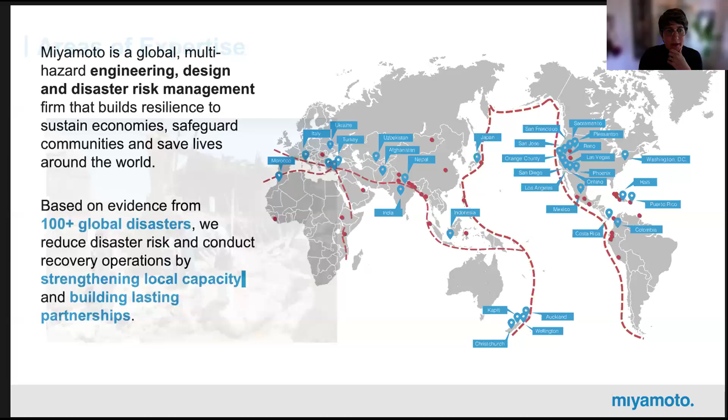So we have quite a bit of areas of expertise. We're able to bridge humanitarian assistance with long-term development and have a more comprehensive series of resilience services that span from engineering to planning to policy. We work with multidisciplinary teams in an interdisciplinary manner. Our areas of expertise range from housing, shelter and settlements that Dave leads, to urban planning and urban rehabilitation, which I lead, to community engagement, behavioral change, policy and planning.

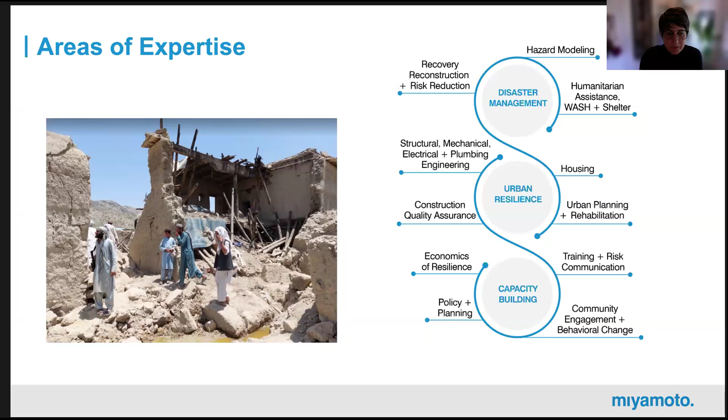One thing particularly important for this presentation is that we're able to provide technical assistance throughout the disaster management cycle, from assessment of damage, to recovery, to mitigation and preparedness. We'll dive into how we leverage local wisdom and vernacular practices within our approach. We'll talk about two areas: self-recovery, more humanitarian assistance and recovery side, and preparedness and long-term development. I'll hand it over to Dave, who will talk about the self-recovery examples, and then I'll take over to touch on preparedness and long-term development examples. So with that, over to you, Dave.

All right, great. Next slide. Hi, I've spent about 25 years working in disasters around the world. Joined Miyamoto about 4 or 5 years ago and lead their shelter and settlements sector. I'm part of Miyamoto's work, as well as working on development projects.

I've just spent the last week or two up in Jakarta working on a risk reduction project, a neighborhood approach to risk reduction in urban settlements in Jakarta. But one of my primary roles is I'm part of the Miyamoto humanitarian assistance team, so I'm involved in our rapid emergency response team.

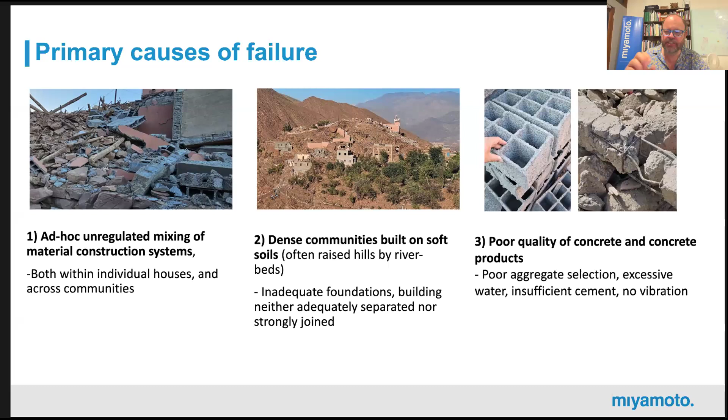We also saw that as those modern elements are being brought back, they're brought back in ways where the traditional knowledge is lost, but the new knowledge about modern building techniques isn't brought in. This is a classic, one of the primary causes of failure that we saw there. You can see on the right hand where these buildings survive, and there's all these little details in there that we as vernacular engineers, used to looking at vernacular damage, can see as good practice.

When we look at the buildings that fell down, we can see these very round stones, and in amongst that, we can see these concrete elements. So, for example, the building that - it's interesting, it's hard to even describe it.

The village on our left, that's a collection of probably 100 houses with small gangways and laneways that you can't even discriminate, to see what was a building compared to another building. It's that mishmash of these peri-urban satellite villages - you can see those concrete blocks in the base wall construction, and a couple of concrete slabs and bits of concrete elements mixed up with stone. So, partial concrete frames with these round stones in between.

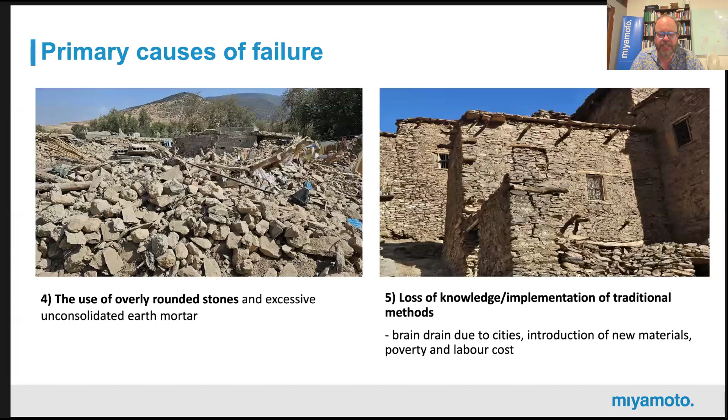The next slide, if we jump into the next one. Here's a great example where we're still seeing, even in these remote villages, buildings that performed pretty well. There we can see some lovely architectural details that have allowed those buildings to survive.

An example would be the floor joists that are poking through the wall - they're not ending in the middle of the wall. In a lot of the newer buildings, people have lost that knowledge and they've ended the floor joist in the middle of the wall.

In fact, on the right-hand side, you can see two buildings built side by side. One of them is a much older building, the one on the right, and you can see that in that older building they've leaned the wall in. The whole wall itself is leaning at about a 2-degree angle.

Stone and mud buildings are the oldest buildings in the world. This is ancient architecture, and buildings in this area have survived hundreds of earthquakes in the past. Part of that is that in an earthquake, stone and mud buildings fall apart.

But if they're leaning in, it's very hard for them to fall apart. So that little 2-degree slope that you can see on the wall on the right makes that part of the building much stronger than the vertical wall of the new element.

We actually met the guy who worked on the old element when he was a child - he did the second story on that element. And we met him, and he built the element on the left as an adult for the owner of the building. Unfortunately, that photo doesn't capture the furthest end of that building, which is actually broken.

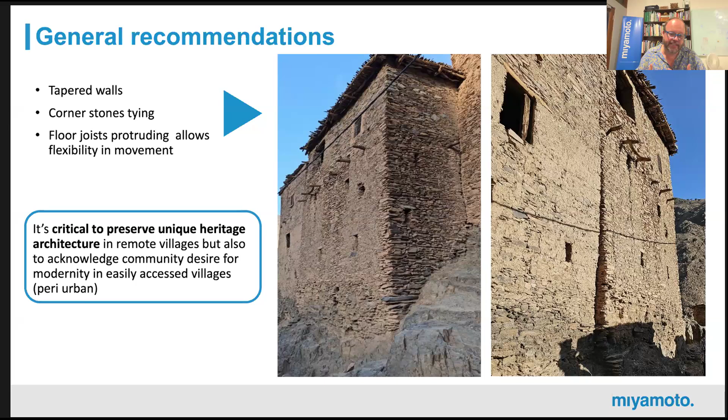Then we can see this preservation of traditional vernacular knowledge that is already earthquake resistant. It's not like we're inventing earthquake resistance for these vernacular buildings - it's more like we're documenting best practice, pointing out poor practice, and sharing that from what we've seen all around the world. So, next slide.

The Turkey earthquake - that's a really interesting example. When we jump into Turkey, I really like it because when we talk about vernacular housing, what is the vernacular of the areas affected in Turkey? And the vernacular is multi-story construction - multi-story, urban, steel, concrete construction.

So we actually go through the same process, sitting down and saying: what stood up and why? What fell down and why? What's best practice? What's worst practice?

How do we document those? And how do we disseminate and encourage people to do best practice and not do worst practice?

So we saw some of the very classic things we know, for example, when building in an earthquake-prone area, it's important that the bits of steel wrapping around the columns are bent back around to 135 degrees. We call that the seismic hook. If they're only bent around to 90 degrees, they can very easily pull apart. We saw that as a common point of failure in the buildings, in the traditional vernacular and in the modern vernacular that fell down.

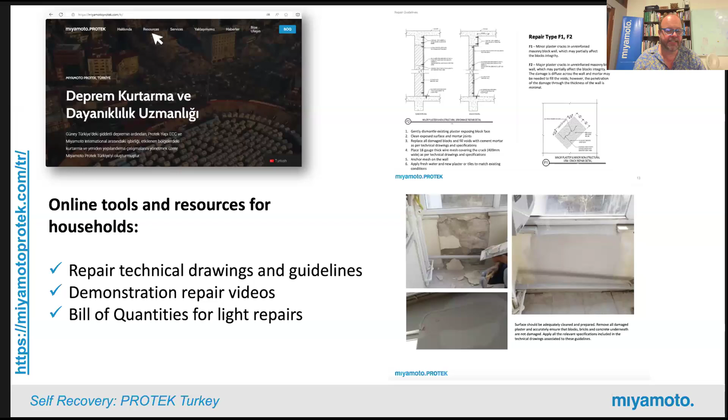So basically what I'm saying is that poor repairs can cause more damage than good repairs that cost the same. For us, it's about how do we give you the advice and guidance that helps you not do something silly and do something clever instead, and how do we make sure it's written or produced in ways you could understand.

The Afghanistan earthquake 2022, that was a lot of fun. Again, Kit Miyamoto and myself, we were on airplanes very early on in the field, right up in the Taliban-controlled heartland, up on the border with Pakistan there, looking at these traditional vernacular houses up there.

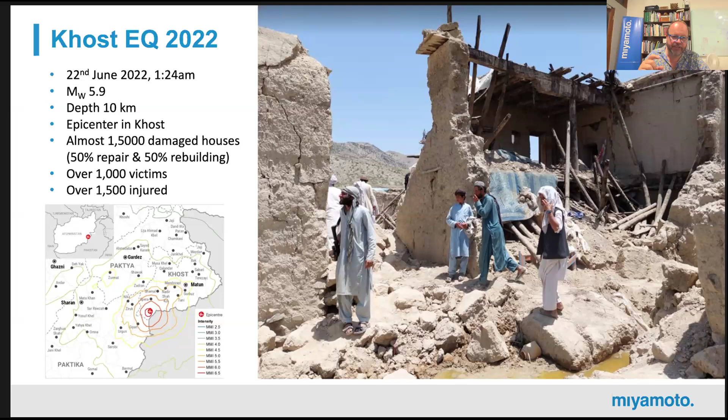In that particular earthquake, we came in partnering with one of the UN agencies. Down on the bottom corner there, you can see one of our colleagues from IOM. We came in, we looked at buildings that had stood up. The building at the top there, you can see those lovely rafters poking through the roof. We started documenting what had worked, what didn't, the housing typology, how people lived in that space, what shelter meant, what housing meant to those communities. Where my colleague is standing, behind him all those big walls have stood up fine, but the building just to the left of his face, the roof has completely collapsed and fallen in. On the ground there, you can see the timbers and bamboo elements that have been salvaged by the community to rebuild those roofs and elements.

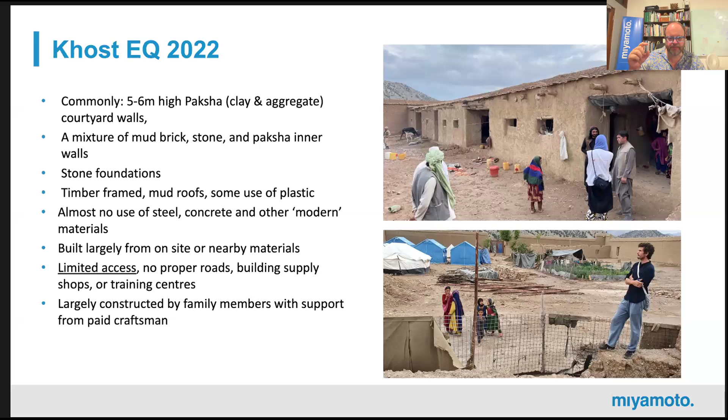So it's again this process of documenting best practice, advising people, not replicating worst practice. Next slide.

I love this slide. One of the things we're very aware of is that classic sentence that an earthquake is not a disaster. There's no such thing as a natural disaster. There are natural events that become disasters because of sociological reasons that lead to poor construction, poor urban planning, poor preparedness. These are the things that turn a natural event into a disaster. So for us, coming in and analyzing what's working, what's not working, and understanding what was best practice gives us the answer to making sure a disaster doesn't occur again. It's not the technology that was the problem, it's the sociological stuff.

What we could see here, we could fly over these areas in helicopters, and this is a classic example where you can see that courtyard construction, these big tall walls that allow for privacy, 5 to 6 meters tall, half a meter to a meter thick, and then little rooms built off the side of those walls. This is a really interesting sociological pattern of living.

It means that in those rooms, you've got different families or different makeups of families living in one room. There could be a couple of men living in a room, or women or children, or families in different rooms. Some rooms are used for kitchen, some for storage. But within one compound is one sort of extended family.

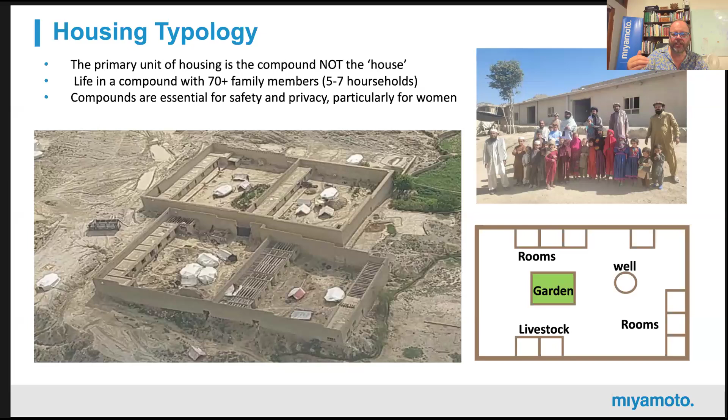The other thing you can see in that photo is that people are already getting on with self-recovery. The roofs of those buildings had collapsed. You can see on the compound on the right, they've put their timbers back, salvaged their materials, lived in their tents, and they're about to rebuild their earth roof. On the compound on the left, they've already done that. At the moment they're still living in their tents because they're a bit scared of the earthquake, but they'll quickly return to those buildings. That understanding of the sociological makeup of what is a house became really important.

Yeah, the next slide's great, Audrey. In that slide you can see a very simple graphic that we developed to explain how those buildings were working from a seismic engineering point of view.

We actually did high performance engineering models, 3D models, and tested the performance of those earth and stone elements. We looked at the frequency of the earthquake, which in that area is a very short, sharp frequency earthquake in very hard stony soils. These big walls can't move at the speed of the earthquake, so they end up rocking very slowly on their base, on that stone base we saw in the initial slide. But the inner courtyard walls are shorter, thinner, lighter weight, and they rock out of sync with the major walls. Then we have this seismic dampening mechanism that happens with the timbers penetrating through all of it.

This is actually really modern high performance seismic dampening system. So what we could do is look at the vernacular, the traditional, assess it, look at what stood up, analyze it, do computer modeling, high level performance engineering testing, and figure out whether this was suitable for the earthquake risk in the area - which mostly it's likely to be, because it evolved there. Then work out what's best practice and what's worst practice.

In those areas, what we could see was that one of the biggest impacts of the Afghan war is that the traditions of construction had often dissipated as people went off to war and also brought back modern, different building materials. They just forgot some of their traditional building practices. So we could document the key points around there.

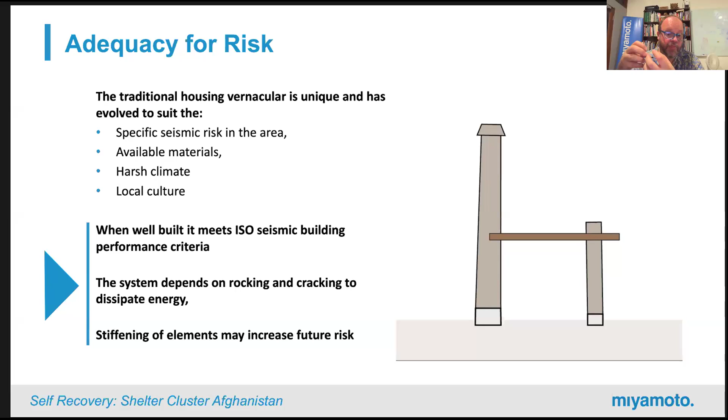We worked with CRAterre, which is an earth construction specialist organization based out of France, to look at the mud technology. We sat down with the masons in the field and recorded what they were doing and what was best practice with them, and then disseminated that knowledge.

So these were the practical training programs that we developed in Afghanistan.

These are just examples of the sort of materials we developed for engineers - these key concepts. Sorry, if you come back one slide, thanks. If you look at that, you can see those key messages that have been developed down the bottom there.

What we're trying to do is document back to people, rather than have NGOs after a disaster being a bit prone to say, okay, we're going to design your house for you. It can be very condescending and paternalistic.

Instead of doing that, we're saying we don't really mind what shape house you build, but here are the key things that made houses fail or succeed in an earthquake. So we're recommending you focus on these technical details. What shape your house is, how big or small, what shape your rooms are, what color - that's up to you and your family and whatever suits your needs. But these points are critical to making sure it will survive an earthquake.

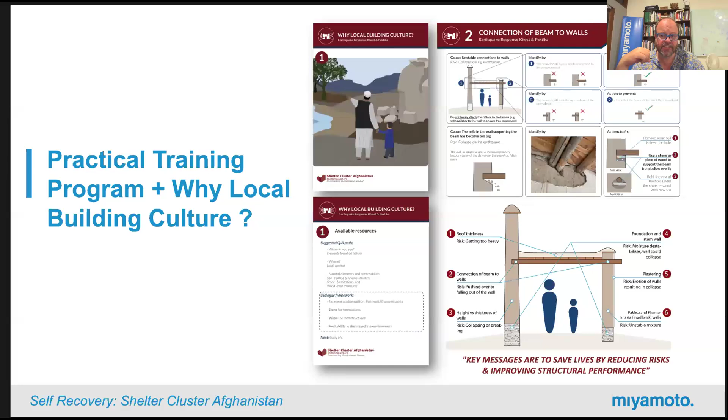We'll reference that again with photos and videos, showing what worked and what didn't, and then develop these trainings. Some of the training material we're developing is more technical, for engineers, and also for the cluster partners, so organizations themselves could understand what went wrong and why.

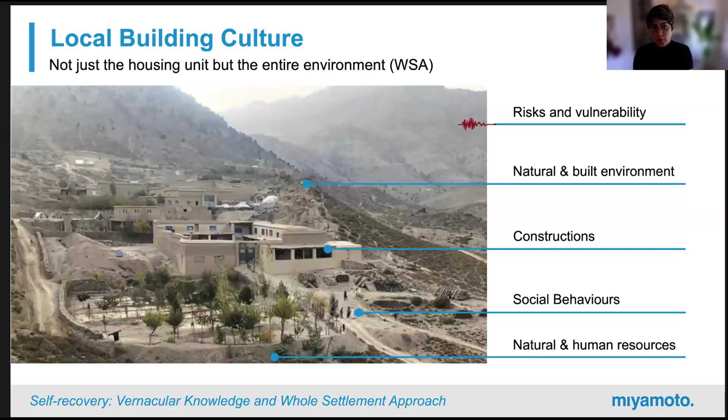Yeah, that's perfect, Dave. This is just the recap slide from the whole settlements approach, going back to the Afghanistan reconstruction efforts, looking and assessing not only the understanding that housing was very much looking at the compound structure, but also assessing that natural and built environment, the risk and vulnerabilities, the social behaviors, just to be able to have a more integrated approach. And with that, just to link a little bit more, as Dave mentioned, that whole settlements approach permeates also into the work that we do around preparedness and long-term development.

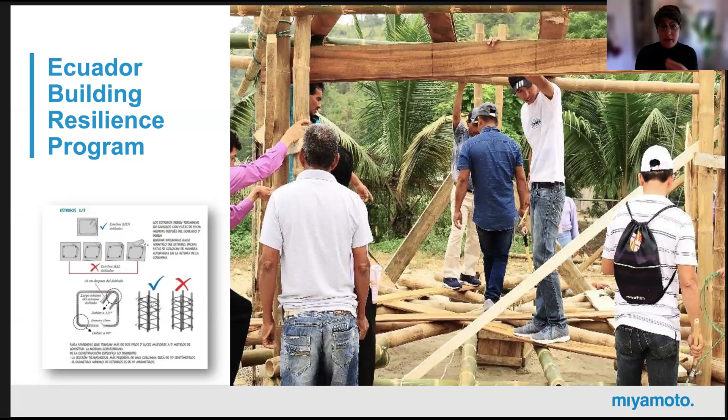Just to give a couple of very quick examples on leveraging that vernacular and understanding of those local practices and local knowledges that exist, we bring that over. So in some of the reconstruction efforts that we've had in Latin America, this is basically the Ecuador Building Resilience Program, really focusing on bamboo structure and bamboo construction, as that was the vernacular in the area.

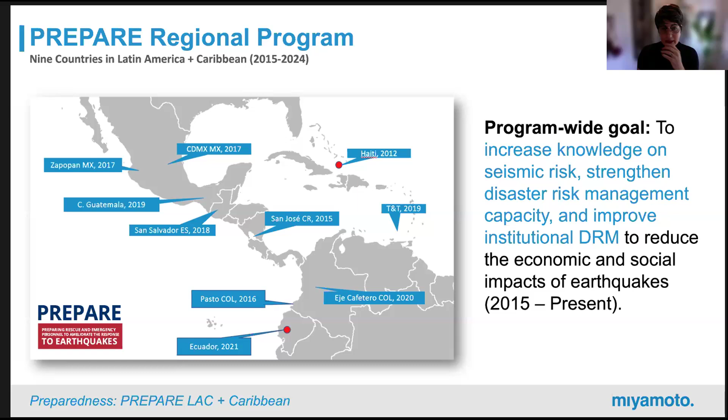But also, this is exactly what we did in a program called Prepare, which is really focusing on increasing that preparedness of the community, increasing knowledge on seismic risk and strengthening the disaster risk management capacity, even institutional disaster risk management capacity overall. We were working in 9 different countries. Looking back at Ecuador, part of that large focus had been on bamboo construction, with a very strong focus on really enhancing community resilience through workshops, promoting awareness, building up that capacity around bamboo construction.

This was straddling not only really looking at the community overall, so working with women and children as well in some of these workshops, but also, just to state it wasn't a dogmatic perspective of 'this is the vernacular and this is what we're going to impose on you,' but really looking at the accessibility of these materials, that knowledge that exists, and really how can we enhance this.

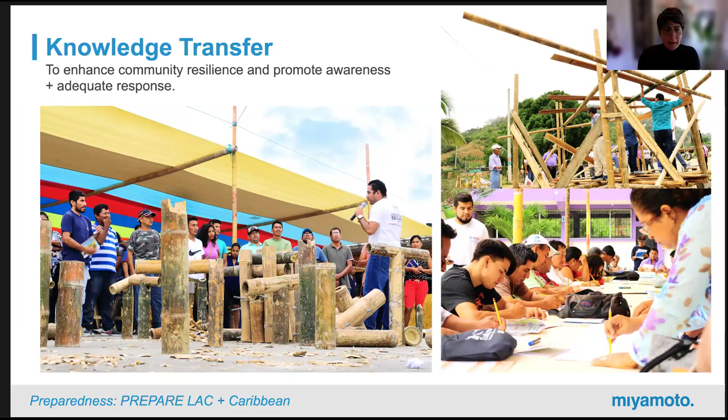So the whole point is to speed up and support the self-recovery aspect, but also support the community resilience aspect alongside. And in this case, some of the work that Miyamoto has done is also seeking that fusion of modern technologies and vernacular, and how to bring innovation in that sense.

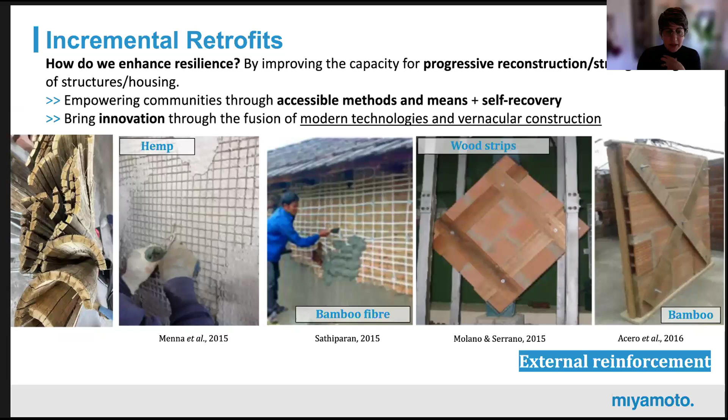And thus really looking at what we call incremental retrofits that become very accessible to communities, where they can build up their own resilience through progressive reconstruction and strengthening of their structures and housing. In this case, really looking at the opportunity of bringing in different materials like bamboo, the esterilla, the bamboo fiber, wood strips, to enhance some of the existing constructions that we're seeing in place. But I'll leave it there at that scale.

I really want to focus a little bit more on the urban scale as well, and just show how we also enhance resilience and climate adaptation, working through leveraging that vernacular in the landscape. So we really work through a system-based approach that acknowledges entire ecosystems, looking at multiple dynamics, going back to this idea of the whole settlements approach. So looking at everything from infrastructure and connectivity and mobility to economic drivers, to use of space and local governance strategies.

We do this in order to bring up urban planning strategies that enhance resilience and sustainability, but do it in a way where we can push forward community development while we tackle risk mitigation, reinforce the ecologies, and foster local economic development. These are processes that put people, nature, and climate at the center of the approach.

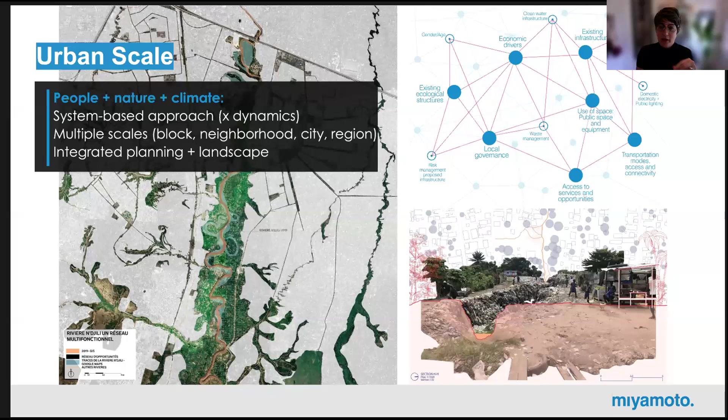There's an importance to integrate natural or landscape heritage into the planning and design processes as a key component to build sustainability and resilience. This has to do in many cases with embracing age-old technologies and local wisdom, and harnessing the power of more low-tech solutions to enhance sustainability.

So anything from passive design principles, where we're taking advantage of the existing surroundings and environment, creating opportunities to create more cross ventilation, and in urban planning, create urban designs that allow for higher shade and thus reduce some of the urban heat that's happening. It's everything from passive design strategies to the use of sustainable materials like bamboo, earth, as we've touched upon, and the inclusion of these nature-based solutions.

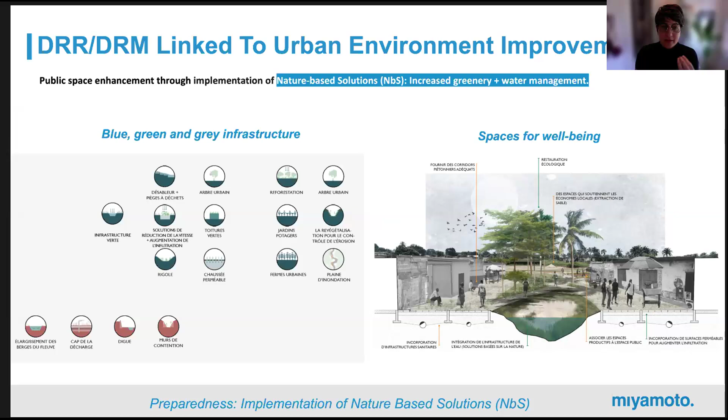Everything from that green, blue infrastructure that we can start integrating to create resilience, through that weaving of local, indigenous, and vernacular practices, and a strong understanding of some of these nature-based solutions and that local landscape heritage that might exist.

We tend to start part of the planning process by really looking at a historical landscape analysis. So, how did the landscape used to behave, understanding how urbanization and growth trends and urban development patterns have gone along.

In many cases, we know that cities have grown disregarding the ecosystems, minimizing permeability and water filtration potentials in the city, making the city very impermeable, which, as we know, with climate change, flood risk has increased, and there are other climate hazards that come into play that we need to be aware about.

So understanding how the landscape used to behave, and then relying on some of these nature-based solutions to bring forth different strategies that can have a combination of grey infrastructure as well as green infrastructure, looking at how we can start integrating these strategies within the landscape to help make it once again function adequately, and make it once again resilient.

Let me go back to that previous slide to show a quick image of a project that's ongoing, where we are working in Democratic Republic of Congo, looking at Kinshasa specifically, doing that historical analysis on the landscape and bringing forth a macro perspective on some of these nature-based solutions and water management strategies in the city.

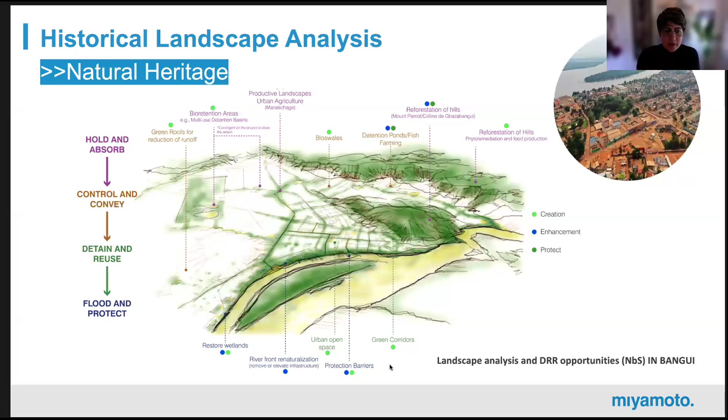Part of the strategy here was not to follow the political boundaries that exist in the communes, but really look at the way that water moves through the city, identify the existing urbanization patterns, and develop these planning strips. You see them in green as key areas to look at.

Again, going beyond the political boundaries, the planning strategy needed to follow that urbanization pattern, but also the way that water was moving through the city in order to enhance resilience. These communes, because they are close to the N'djili River and have been highly urbanized, with a lot of informal construction as well, are also extremely flood prone.

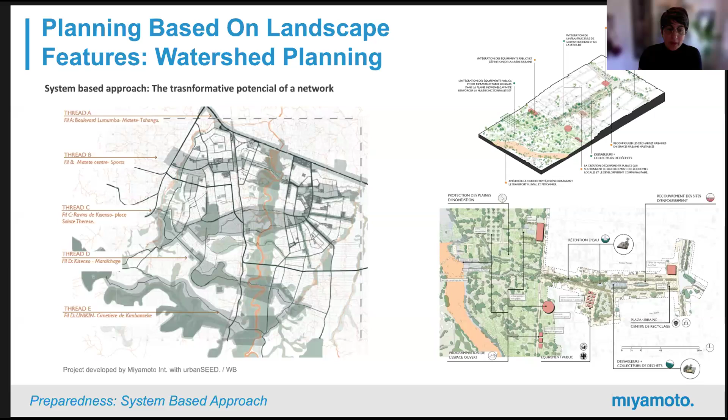So in this case, these were identifying natural runoff and rainwater drainage areas, where we could start designing certain prototypes that would not only enhance the way water could move across the site and mitigate flood risk, but could also integrate, through co-creation and participatory processes, an understanding of what the community expected and needed, creating multifunctional spaces that integrate nature-based solutions as a resilience mechanism, redefining how water moves in the city, and enhancing community strategies.

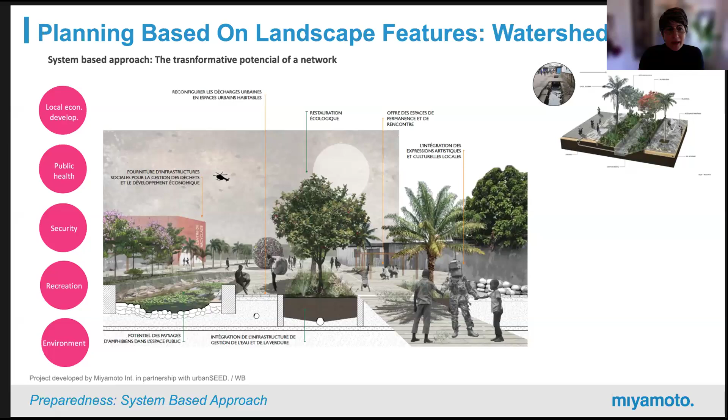In this particular area, there's a very strong focus on local organizations working on recycling. So part of the strategy and conceptual design brings in some of those potentials, looking at integrating public equipment like a recycling plant, as well as public space that can foster community development.

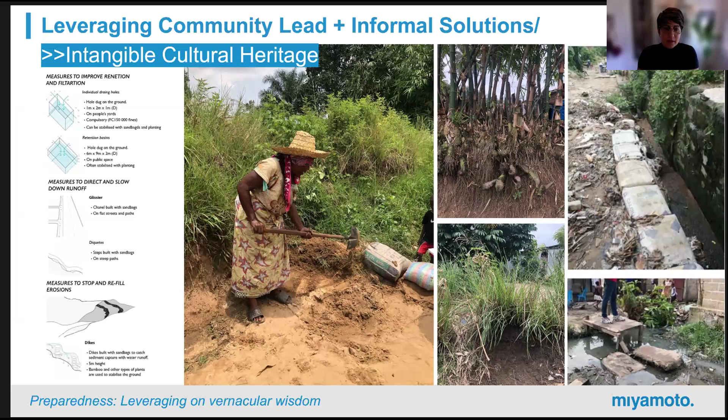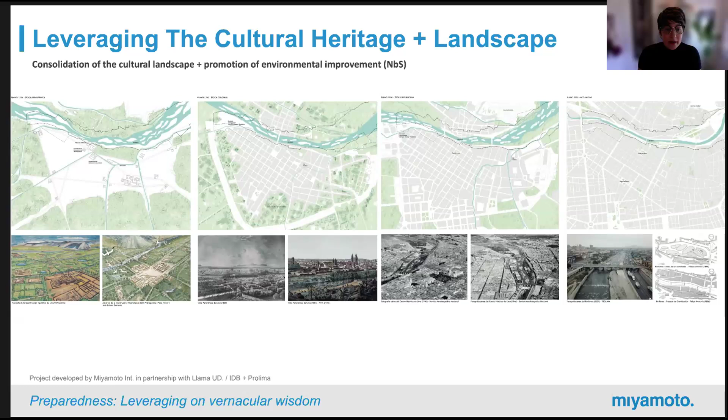All of the natural movements that water was making get eliminated as urban development evolved. At the bottom you see the evolution of that representation of the landscape and how gray it then becomes, exacerbating the flood risk in the area.

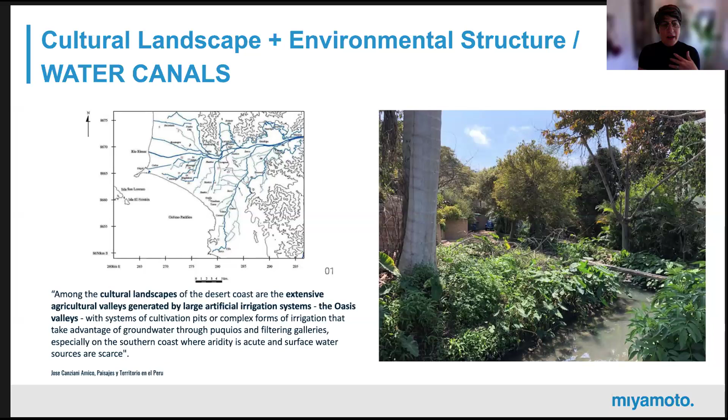So part of the strategy, noting that some of that infrastructure is still very much in place, just covered, has been to recognize the existence of these pre-Inca channels and recuperate them, seeing how we can bring them back into the urban fabric.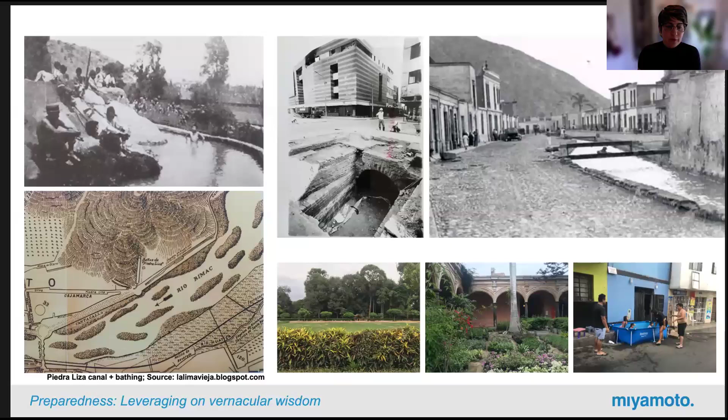And we see that there are a lot of cloisters in the city center, and these are spaces where the central urban plaza has like this smaller oasis, and trying to understand how we can start tapping into some of the existing potentials to really put forth strategies.

That can integrate and reinforce the landscape, bringing back these pre-Inca channels as green corridors through the city, being able to optimize these existing green spaces and opportunities throughout the city and really create an interconnected network that can enhance urban greening, address water filtration aspects of the city, and really push forth that resilience overall.

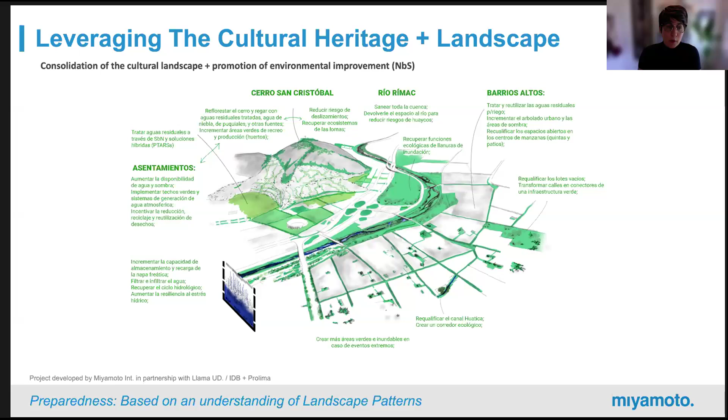And as one concluding thought, echoing some of what Dave said, what we're seeing in some of these examples is that recognition of building resilience really comes with the recognition of heritage. It comes with empowering self-recovery from people, as well as preparedness, allowing them to take charge and giving communities the necessary tools.

Once we understand through the diagnostic of the area, through that whole settlements approach, we can hand over the necessary information to empower communities so they can take forth their own self-recovery or resilience enhancements. So we definitely see that indigenous knowledge and vernacular practices hold a very strong influence in some of this.

And also acknowledging that there is an evolving culture, a constantly evolving one, where it's not about mummifying necessarily practices and knowledge, but really about working with communities and enhancing some of that existing knowledge, but when necessary, bringing forth different solutions that can again leverage local knowledge and wisdom as well.